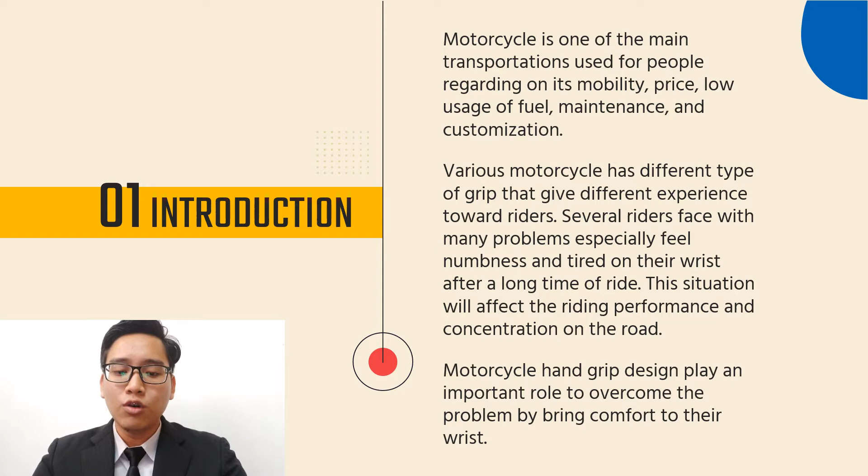Because of that, riders face many problems, especially numbness or tiredness at their wrist area. This situation will affect riding performance and concentration on the road. So, motorcycle hand grip design really plays an important role to overcome this problem. One of the methods that can be used is Kansei engineering. From that, I can collect and gather information from people on perception of comfort of hand grip.

Kansei engineering is a technology used to translate customer feeling into product design. Before this, there were many examples of using Kansei engineering in industry, such as the Miata sport car by Mazda, toilet bowl, and lingerie. This method is used to increase the satisfaction of customers toward their product.

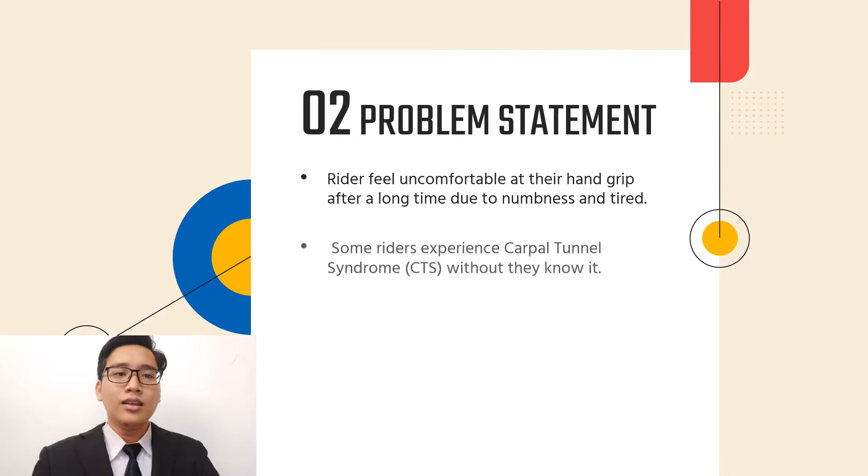Next is problem statement. Riders feel uncomfortable at their hand grip after a long time due to numbness and tiredness. Some riders experience carpal tunnel syndrome (CTS) without knowing it. And some motorcycle hand grip designs are not ergonomic enough or convenient for daily use.

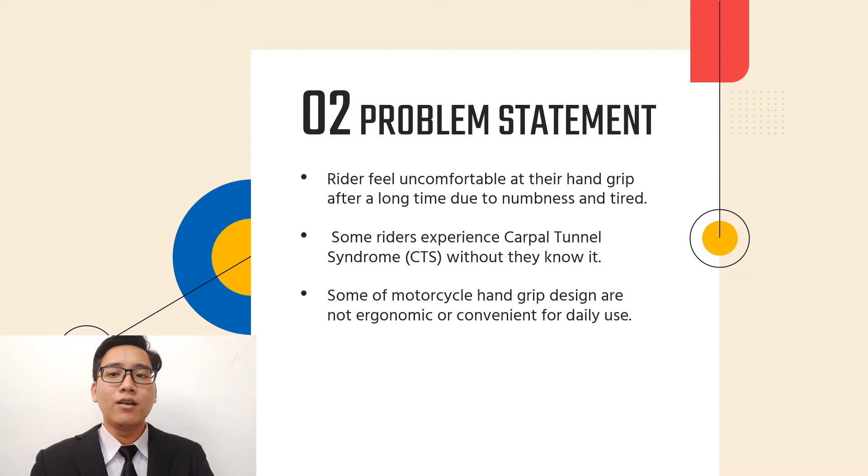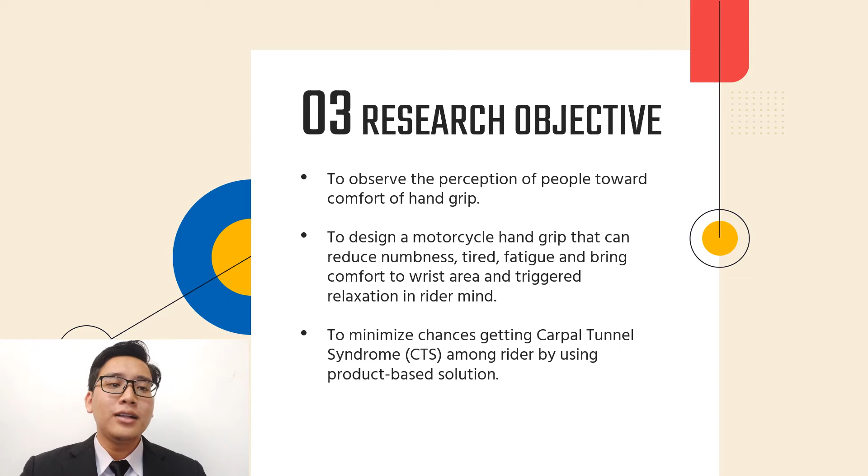Next is research objective. First, to observe the perception of people toward comfort of hand grip. Second, to design a motorcycle hand grip that can reduce numbness, tiredness, fatigue, and bring comfort to the wrist area and trigger relaxation in the rider's mind. And lastly, to minimize chances of getting carpal tunnel syndrome (CTS) among riders by using a product-based solution.

Next, I will explain the literature review based on previous studies or research. First literature review is the definition of Kansei. Kansei is a Japanese word referring to feeling, emotion, sensitivity, and sensibility. Kansei is closely translated as the psychological feeling people have for a product such as the size, shape, smell, or anything else. Kansei also can be defined as a logical feature where the process started from the selection of sensory function.

Kansei engineering. Kansei engineering is one of the ergonomic divisions for development of modern products based on human feeling. Kansei engineering is a technology for translating customer feeling into the product design.

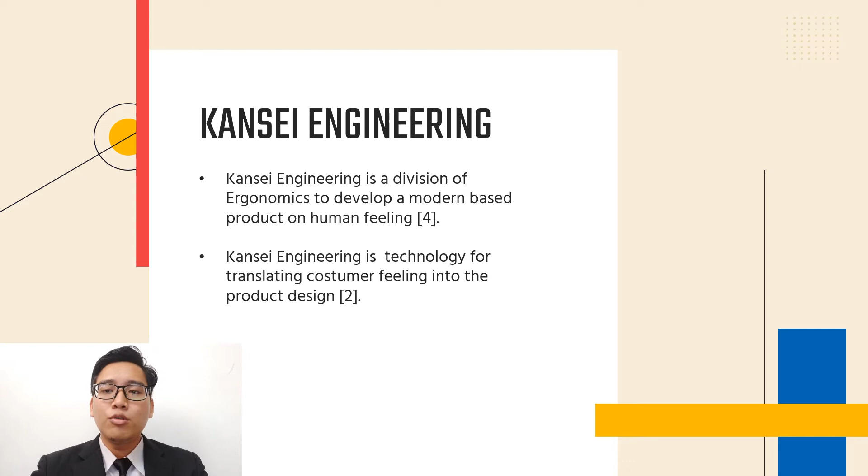Next, I will explain the motorcycle hand grip design. Motorcycle hand grip safety and comfort is more important compared to its appearance or aesthetic value. If we select a bad grip, it not only feels uncomfortable but also will bring danger that will lead to accident. Besides that, each person has a different way to grip, so they will experience different feelings while gripping the hand grip. They will feel some uncomfortable feelings like numbness and tiredness after a long time of riding. This situation might be caused by bad selection of hand grip design.

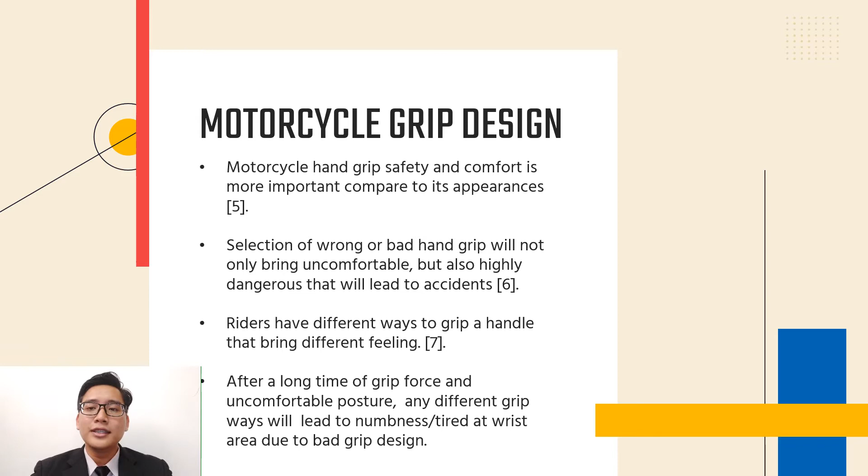Previous study found that bike components such as handlebar, grip, and saddle style contribute most to bring comfort to a user. So, ergonomic hand grips provide greater control of throttle by helping reduce vibration and losing balance because less pressure is needed. Moreover, unique ergonomic hand grip designs, especially those supporting the carpal tunnel area, will act as defense from getting carpal tunnel syndrome (CTS).

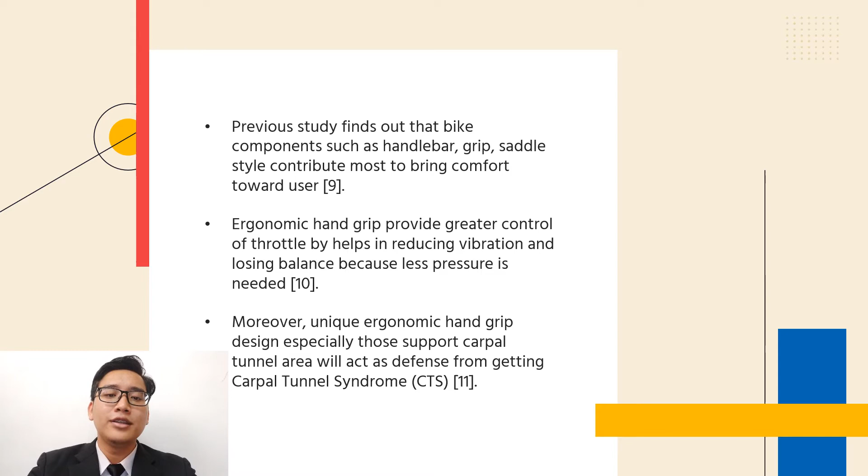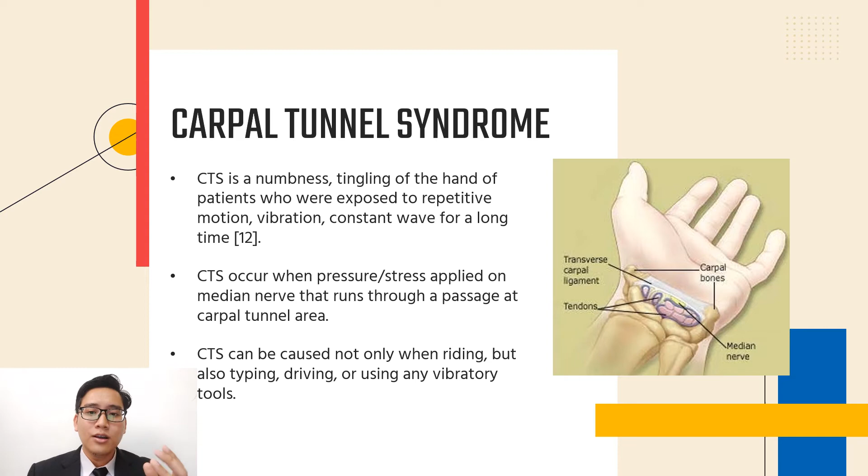Last section of literature review is carpal tunnel syndrome. Carpal tunnel syndrome or CTS is a feeling of numbness and tingling at the hand of patients who were exposed to repetitive motion, vibration, or constant wave after a long time. CTS occurs when pressure or stress is applied on the median nerve that runs through a passage at the carpal tunnel area. CTS can be caused not only when riding, but also typing, driving, or using any vibratory tools. The figure shows the location of the carpal tunnel area and the median nerve.

To prevent CTS, especially for riders, they can use a padded glove, have a special throttle, provide a locking throttle, decrease the level of angle of the control bar, and use a suitable and comfortable hand grip to minimize any vibration absorbed from uneven road surface. The specification of the hand grip must be soft, smooth, and comfortable not only for grip but also for airflow to circulate freely around the wrist area. Usage of a suitable hand grip can reduce stress in the wrist, tiredness, and fatigue both on the hand and the rider's mind.

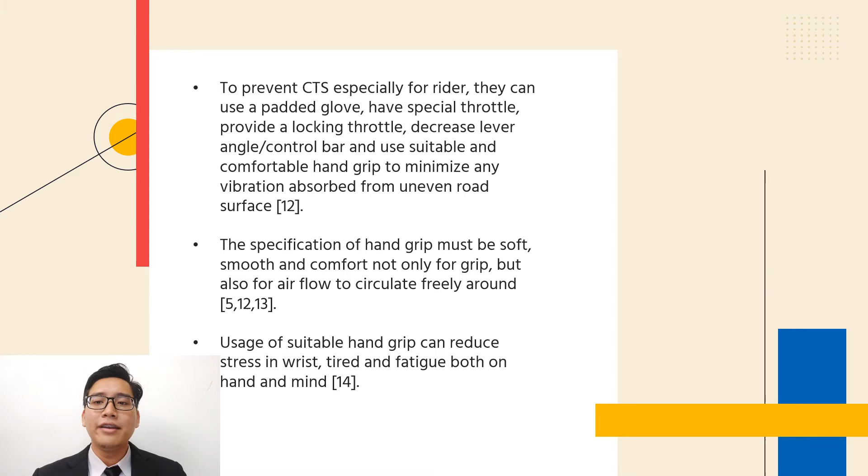Next, sketching and designing process is taking part to design the hand grip. CATIA V5 software is used to generate this design. Later, force and pressure analysis of the design is also run on CATIA V5. If the design does not fulfill the evaluation needed, it will start back with the conceptual study process. If yes, it will proceed to the next step for further analysis. In the next stage, the design will be ready to be produced by 3D printer and undergo testing and simulation.

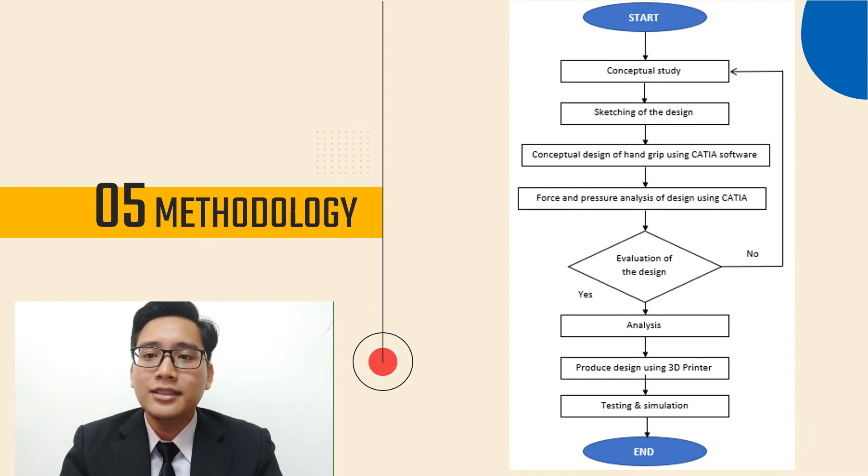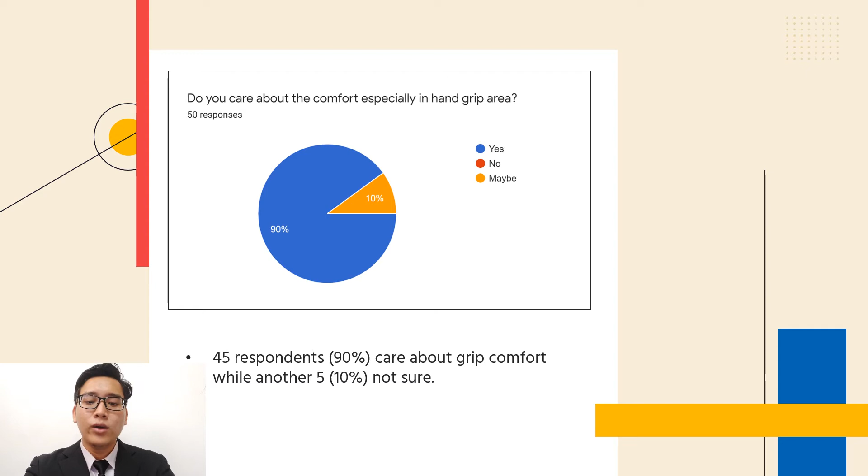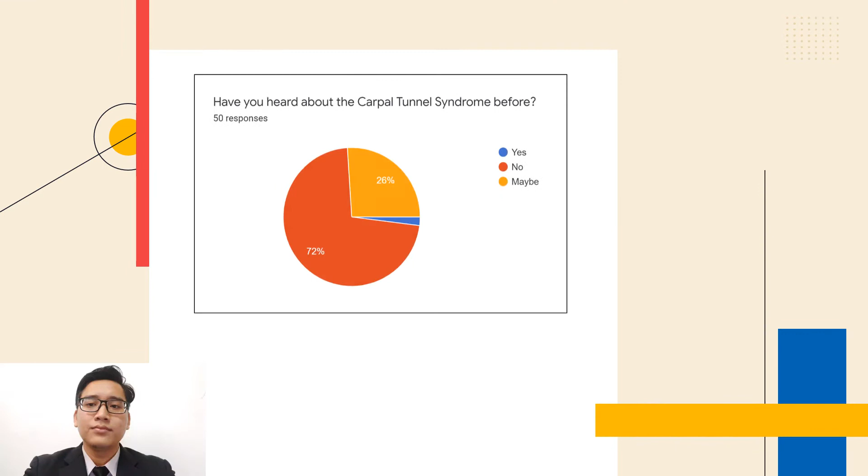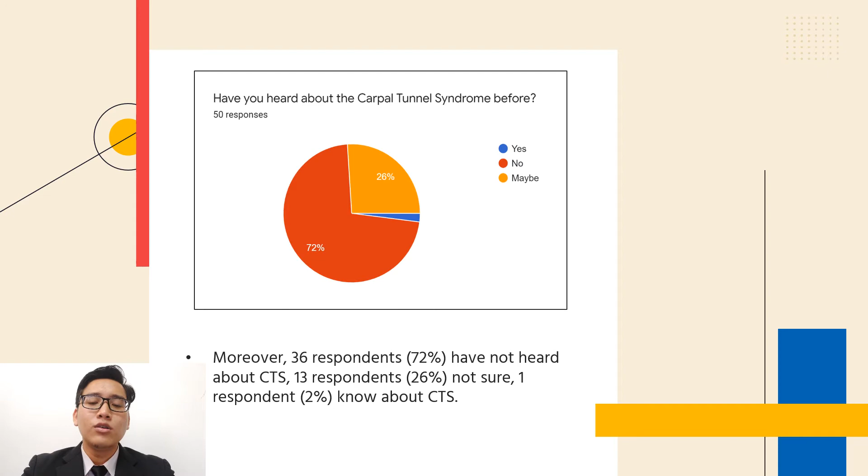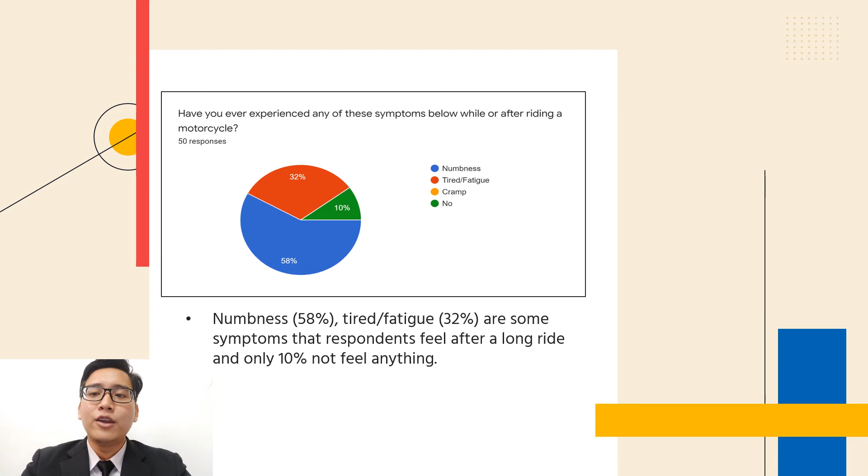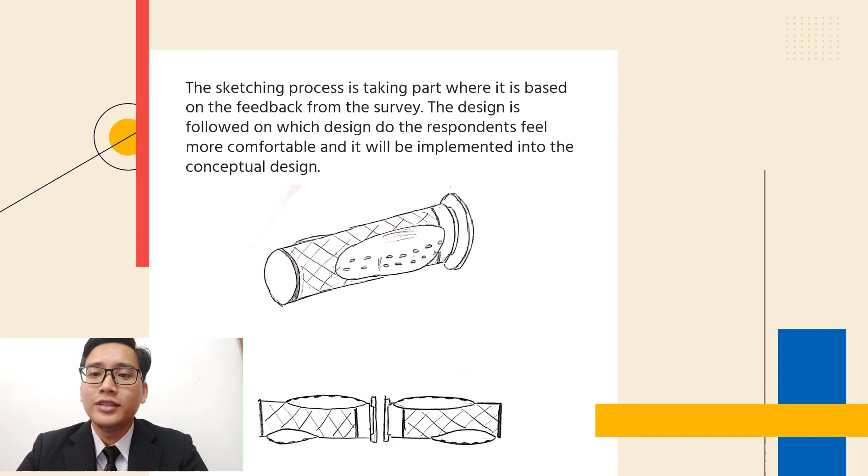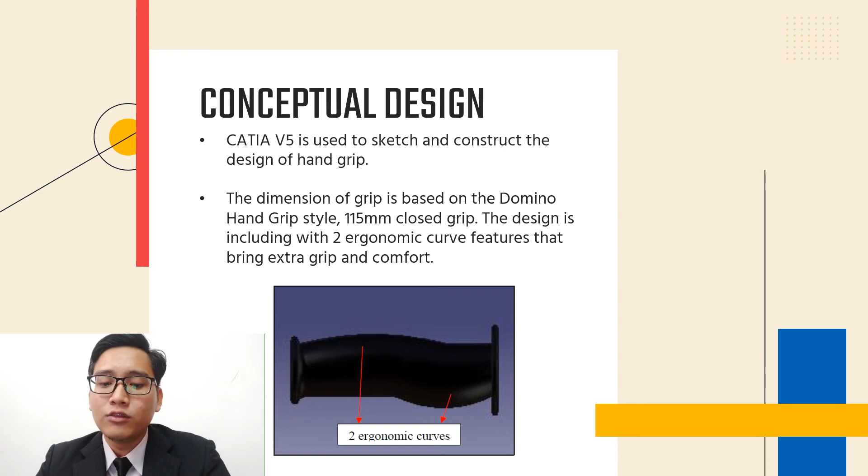Next is sketching process. The sketching process is based on feedback of the survey. The design followed which design the respondents feel more comfortable with. The figure shows the sketching of this hand grip design. Next, we move to conceptual design. CATIA V5 software is used to sketch and construct the design. For the dimension, the grip is based on Domino hand grip style 115 mm close grip. The design includes two ergonomic curve features that act as extra grip and comfort to the user as shown in the figure.

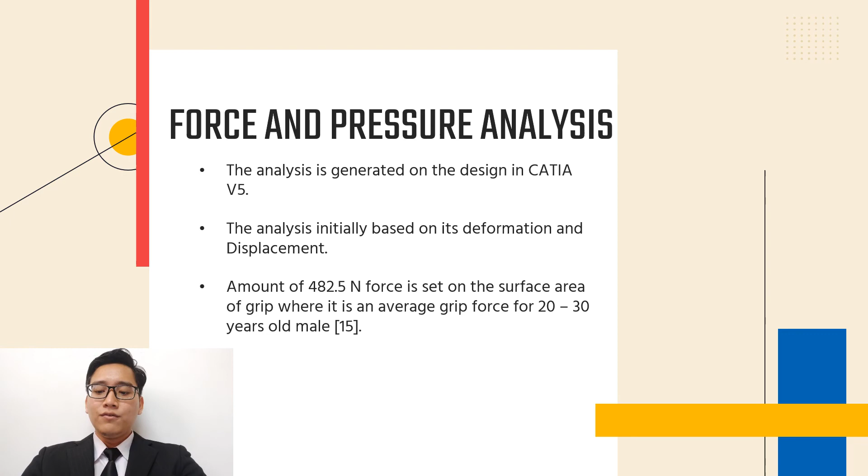Next, we move to the analysis. Force and pressure analysis is applied on the hand grip design by using CATIA V5 software. The analysis is based on its deformation and displacement. An amount of 482.5 Newton is set on the grip surface because it is an average grip force for males aged 20 to 30 years old. The video shows the animation of deformation of the hand grip design. Next video is about displacement of the hand grip design.